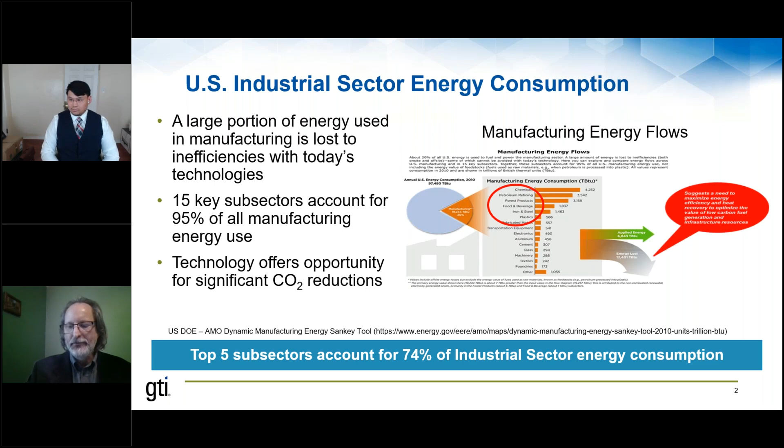We also look at the industrial sector as being one of the top producers of CO2 emissions, and we certainly don't want that designation. But most of the CO2 emissions in this area are from combustion, and natural gas is the primary fuel source. We can see quite a distribution between the CO2 emitting sources, but overall, greater than 35% comes from chemicals and the refining industry, with quite a diverse application as well.

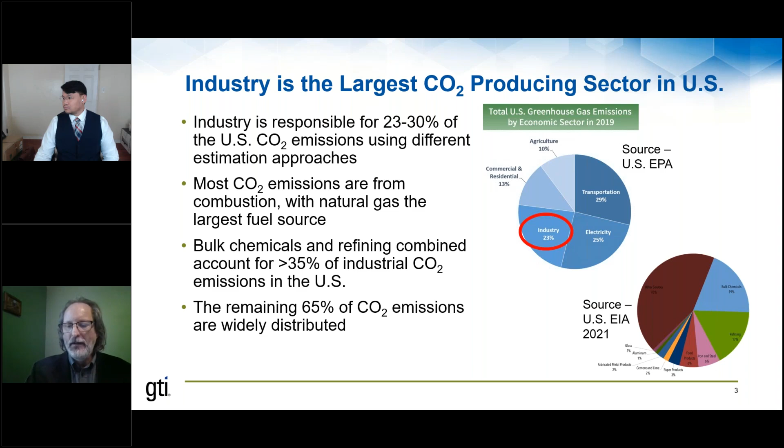When we look at industrial thermal heat, there's 2 paths forward. One is the direct route that could be used in fluid heating application, distillation, or drying, such as textile drying. The other could be indirect, where it's basically used to produce steam for the process.

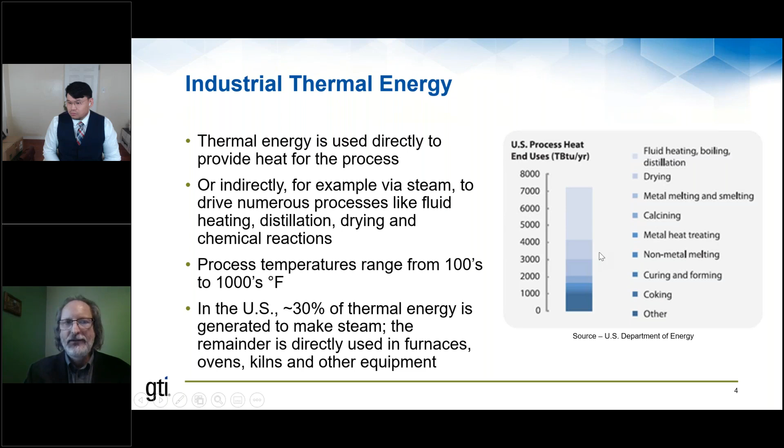And the processes in the industrial space are very, very broad. They range from operation process temperatures from hundreds of degrees all the way up to thousands of degrees. You see a pretty substantial distribution of the energy portfolio for different processes on the right side of the screen.

When we look at the future and start to have discussions about decarbonization in the industrial space, we start to hear about the use of hydrogen, ammonia, other alternative carriers. There's one thing that's for certain about the future, and that's the fact that end users will demand that the thermal energy fulfills their requirement for the process at a competitive cost.

We basically see this demand and characterize it two ways. The first is a temperature, which is set by the process. It could be a roasting application, a batch furnace, or a typical boiler application, and these vary significantly. The second attribute is the load, which is the rate of thermal energy that needs to be transferred to accomplish that process. The underlying fact is that industry needs energy that provides the temperature required, and energy that provides a substantial load for the process.

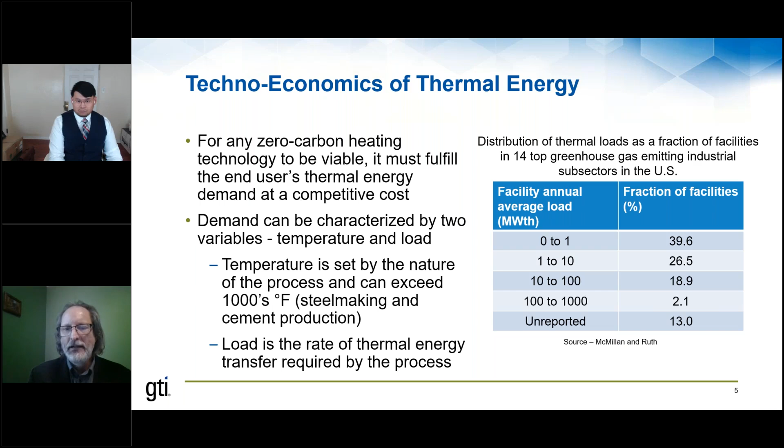When we look at effective thermal energy management, the best way to utilize energy is for every BTU that's consumed, that BTU needs to play an active role in the process. We're simply not at that level right now.

There's been significant discussion about waste heat characterization across different sectors. This most recent study characterized the spectrum as low-grade heat below 300 degrees, about 22% of the market. Mid-grade from 300 to 450 degrees Fahrenheit is about 25% of the market, and greater than 450 degrees Fahrenheit is over half the market. When we look at this, we ask ourselves, there's significant opportunity to recoup BTUs here and apply them to different processes within that application.

Essentially, if we want to really make headway in terms of moving towards a decarbonization approach globally and in the United States, we need to start looking at energy management. It's easy to say that we can switch to electricity or hydrogen or whatever the alternative carrier fuel would be. But remember, the industrial sector consumes almost 20 quads of energy, and a good portion of that, about 13 quads, does not participate in the process itself and is essentially wasted. So it's going to be one thing to try and find alternative sources for 7 quads of energy, and it's going to be much more difficult to find alternative sources for that full 20 quads of energy.

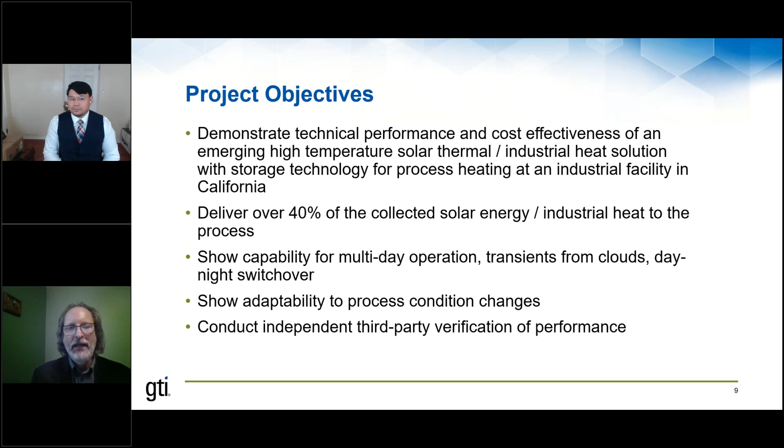As we develop the technology and scale it up, we see the first market entry point as being a 2 megawatt system. What we envision from this is, through the process, capturing at least 40% of the solar energy or 40% of the industrial heat energy and being able to transport that through the system.

Let me show you graphically how the system works. If we were to have a sun shining down on a typical parabolic trough, which is a curved mirror with a pipe in front of it through which the heat transfer fluid travels, that sun would shine onto the mirror and the rays would heat up that pipe.

Now this system on sun could easily be replaced with a batch furnace, a galvanizing line, a reheat furnace, or a roasting operation, where instead of the pipe receiving heat from the sun, this pipe would be located in the flue of the process, and the flue gases would travel across this pipe to heat up the fluid.

The way the process works is there's a hopper full of particles, and there's a blower. The blower starts and conveys particles through the piping, through the heat source. The heat is conveyed from the process into the particles, and then the particles are transferred to a storage hopper for later use, or directly to the process itself through a heat exchanger to dissipate the collected heat to the process. As the particles leave, they cool down and return back to the storage vessel, a closed loop system.

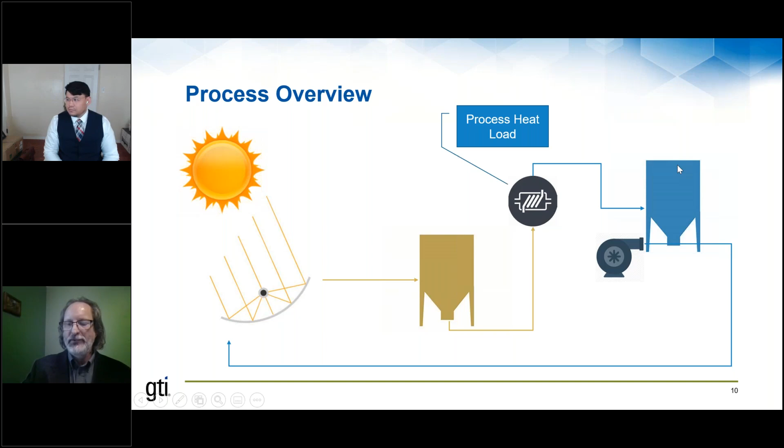When we look at it from the solar perspective, we have this solar concentrator, the parabolic trough, and the gray cylindrical pipe there is the typical absorber. What our process does is add a vacuum tube around the gray pipe, or the absorber, and that's a vacuum. Inside this glass pipe, there's this red image that represents a secondary concentrator.

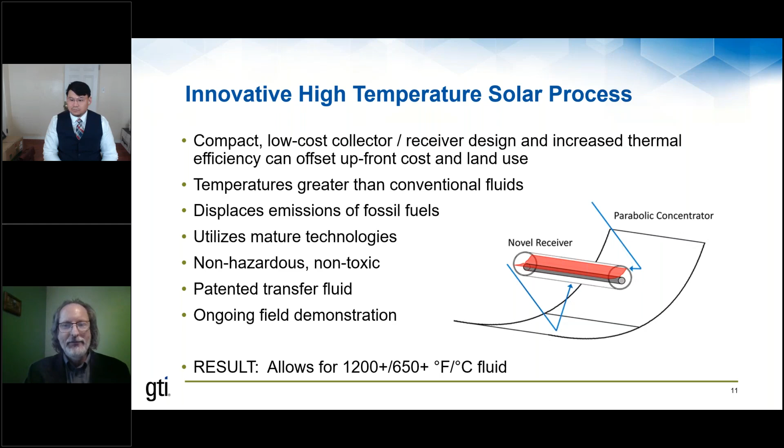In the traditional sense, when the sun comes in and is reflected off the mirror and absorbed onto that absorber, only a very small section of that absorber is illuminated by the sun. But by adding these non-imaging secondary optics shown in red, we are now able to take the solar coming in and bouncing off the mirror, and it bounces off the secondary concentrator to completely illuminate the absorber. We call this the pi effect. This allows us to take what would be a traditional receiver that operates at an output temperature of about 400 degrees C and increase the output temperature up to 650 degrees. Not a lot of changes, just very specific changes.

When you look at the industrial heat aspect of it, you can step back and say, well, what if I don't want to do solar? I have this nice reheat furnace that has a lot of heat going up the stack. Let me replace the parabolic concentrator with an industrial application, my reheat furnace, and I'm able to grab that energy going up the flue and recycle it back to the process or another process within the plant. There's tremendous opportunity there for advancement.

When we look at the industrial sector, over 46% is dedicated to process heating applications. A lot of potential moving forward.

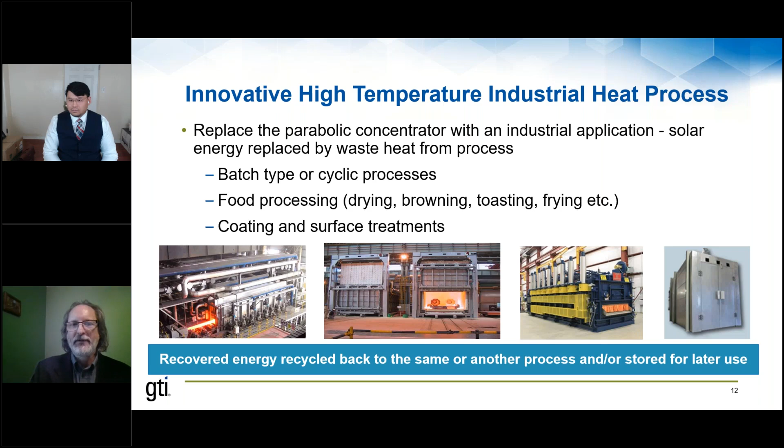Let's talk about the fluid. We have this particle, and we convey it through the system with compressed air. Very generic, nothing elaborate. When we first started the research activity, we looked at about a dozen different particles. Some of them stick, some of them clog, they didn't work. We looked at different size particles and really dug in to find the limitations of different sizes. It's important to have a certain shape of particle, because as it's flowing through the system, you certainly don't want abrasion destroying your piping. So we spent a lot of time characterizing the particle flow as well.

We use something called dilute phase transport, which I'd equate to being in the middle of a snowstorm with the particles being the snow coming down. Ultimately, what we did is focus on something called dense phase transport, which I'd equate to having a tube of toothpaste and squeezing the end of the tube—the particles travel through the piping in a slug fashion, moving through the entire network as that slug moves forward. We learned a lot during the development, and it was really exciting.

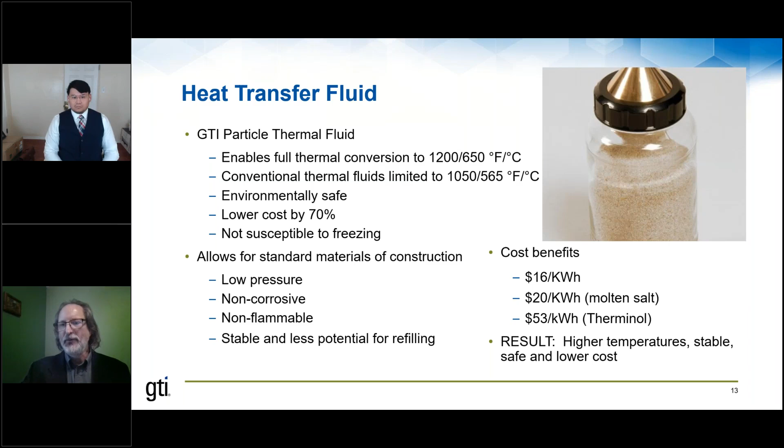So in terms of high temperature heat recovery, there's two paths. The first is to have a solar concentrator and have the benefit of capturing solar heat for the advancement. The second path would be to apply that technology through an industrial heat application with proper particle handling equipment, which is all very mature, and it would transport the particles in a dense phase mode, and it would offer the storage component as well.

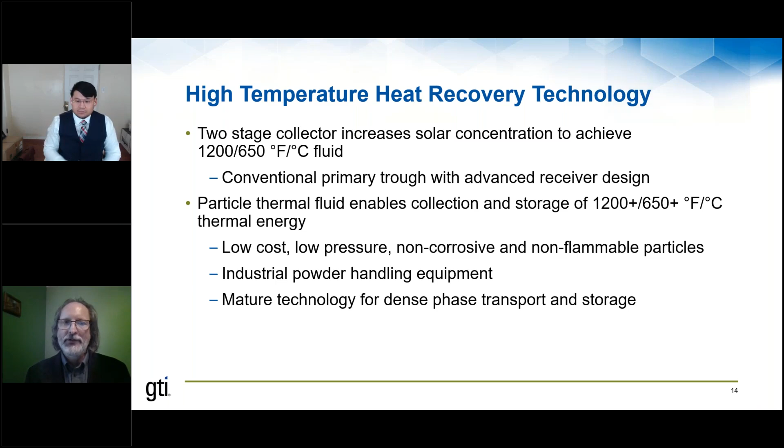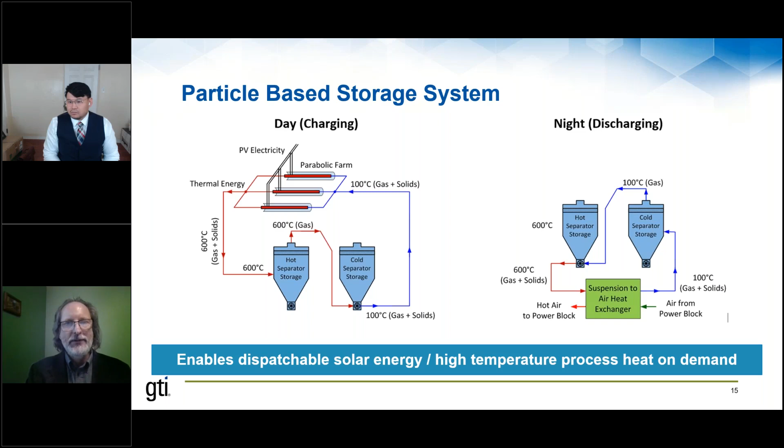This particular graphic shows a little bit more details. In a typical charging operation, the particles leave the cold hopper at a low temperature. They go through the solar component or the batch furnace in the industrial sense, pick up that heat and come back. In the discharge, you send the hot particles through a heat exchanger. What's critical is that you have the ability to store high temperature process heat for off-design time throughout the day. In order for solar to really be a viable technology moving forward, it needs a storage component mechanism, and this offers that mechanism.

This slide shows some of the early work we've done at the University of California, Merced. It shows the particle rig in the background on the left graphic, together with a parabolic mirror and our absorber that was 1 meter long, on sun testing, with a close-up image on the right side. It's really impressive to see the amount of sun coming off the mirror and illuminating that 1 meter long absorber.

This particular system has operated at 685 degrees C. That's the outlet temperature, over 1200 degrees Fahrenheit. And we had multiple discharge cycles throughout the test campaign.

The storage hopper has a defined volume. As you transport those particles through the system, you come to the point where you consume the available volume of particles in that storage vessel, and then you have to recharge the system for the next round. We consider that a particle cycle. We have over 200 cycles on this particular system on sun, producing heat at 685 degrees.

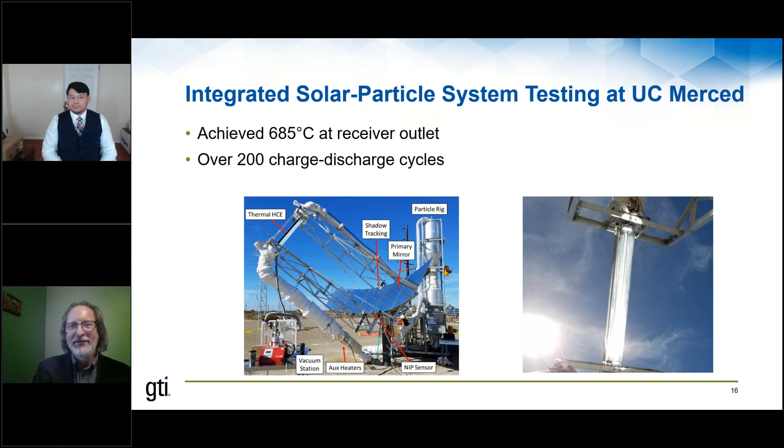We started that work with the smaller 1 meter long absorber, and now we're transitioning to a typical parabolic trough. For those who may not be knowledgeable in that area, there's an image in the lower right-hand corner. A parabolic trough is 17 meters long by 7 meters across, and the solar farm is made up of several of these. When we look at scaling our technology, we would need about 90 of these parabolic troughs for a 2 megawatt system. Right now we have a single parabolic trough unit installed at the University of California, Merced, where we're testing the absorber to characterize the performance of the system.

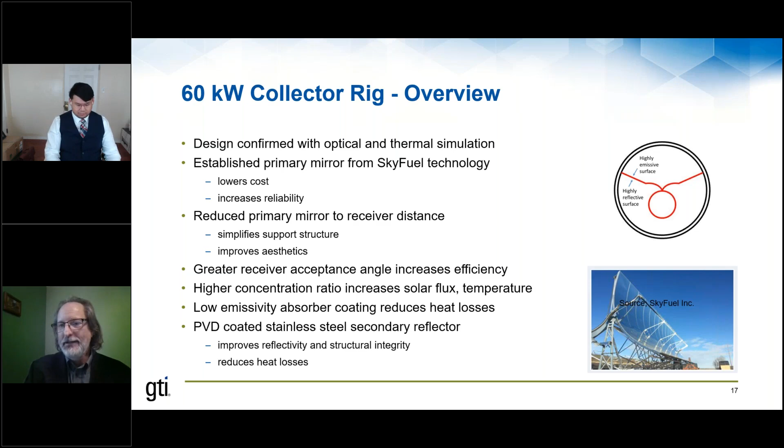The work completed at GTI has been the particle work. We built 2 test rigs that will be transported to University of California, Merced, and then combined with the system, and the entire unit will be tested on sun. Really excited about the potential to bring these 2 units together.

This slide shows the particle work we've tested and developed at GTI. On the left side, you see a storage hopper - for perspective, this is 6 foot by 6 foot, and about 16 feet tall. It's all skid mounted, ready for transport, and can be turned on its side and transported via semi-truck from outside of Chicago, Illinois, to the Merced campus. These smaller pictures show how we've integrated all the controls onto the skid to make it self-contained.

As we transport the particles through the system, we use this load cell on the storage hopper to give us an idea where the particles are. We know what the initial weight is of the storage hopper, and we know how much weight we put in the hopper regarding the particles.

As we monitor that weight in this vessel, we also know the length of the piping that connects these two units and the diameter, so we could characterize where our particles are throughout the system. On the right side, you see the other two units we built: the receiving hopper at the top and the lock hopper at the bottom.

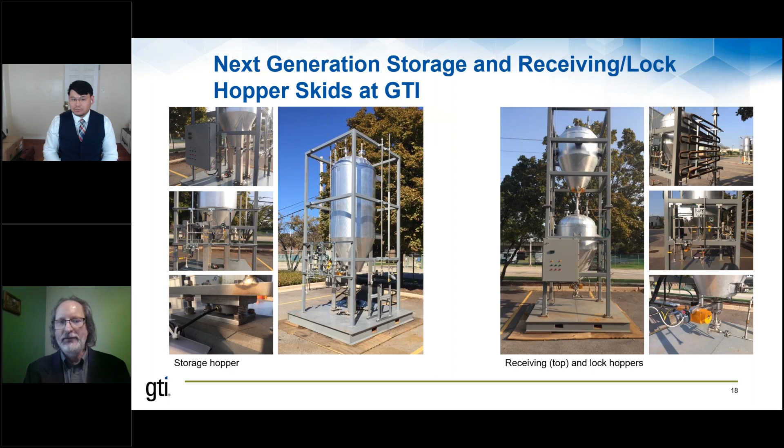So let's talk a little bit about the advantages. This is really what is a necessity for solar to be available mainstream: a dispatchable, renewable storage solution where solar heat can be captured, stored, and then used at a later date. We're very inclined to the sustainability movement, the synergies with the environment, the environmental awareness and safeguards as we're developing the technology.

To ultimately expand the renewable portfolio. I'll show you in the next slide a little bit more on the solar. But the main driver here is the potential to come away with solar heat or industrial process heat by reducing the consumption of fossil fuels and CO2 emissions. So we're contributing to our future in a sustainable sense, being able to manage the fuels that we have and the mix of technology that we have.

And what I've shown you today essentially uses, for the most part, mature technology, with the exception of the non-imaging optics that were part of the solar collector. And it offers a tremendous opportunity to capture some of that waste heat that's available in industry.

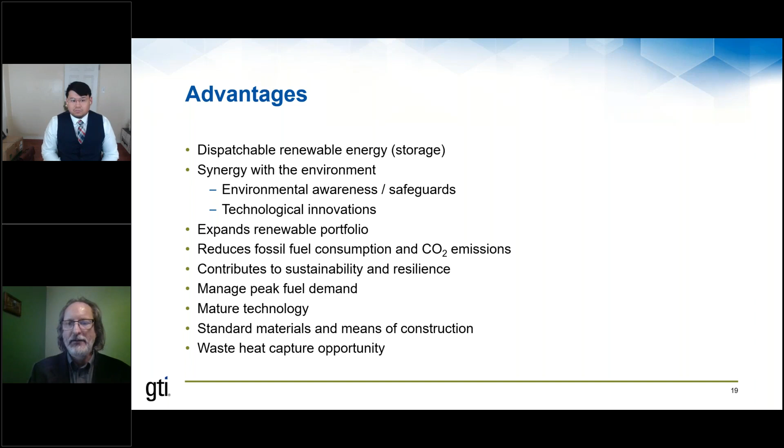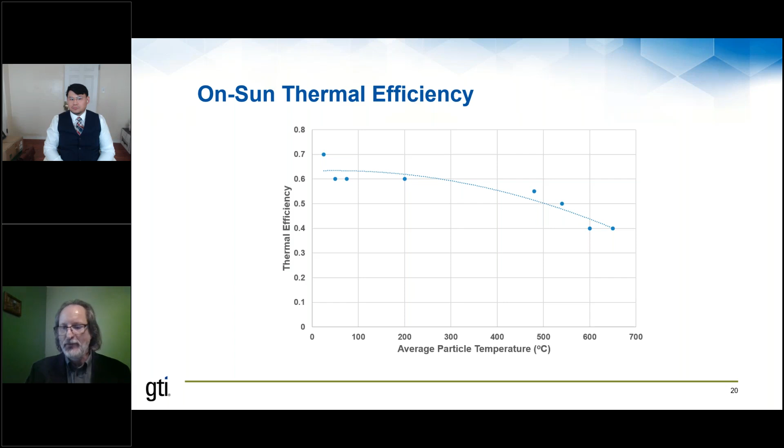And so in terms of applications, we see process heat as the near term. It can certainly be power generation, but that's complicated by the power block, and there's significant additional costs associated with the power block. So I would prefer to defer that for further down once we get some experience of putting these units into the system, out into the application and end user environment.

And the other point I wanted to touch on is that based upon my industrial experience, there's a lot of end users that are really limited in terms of capacity with their existing system. They're peaked out in the summertime because of the cooling loads, the electric infrastructure, with the blackouts rolling across the state periodically. But there's also those consumers that are at the limit of their permit—they cannot burn any more additional fossil fuel because they would go over the permit value. So this type of technology gives those users the opportunity to back off on fossil fuel, to basically increase their production output by installing such a system as this.

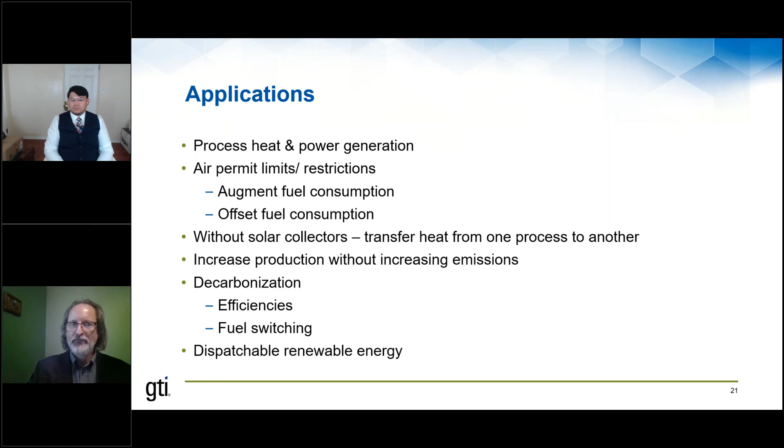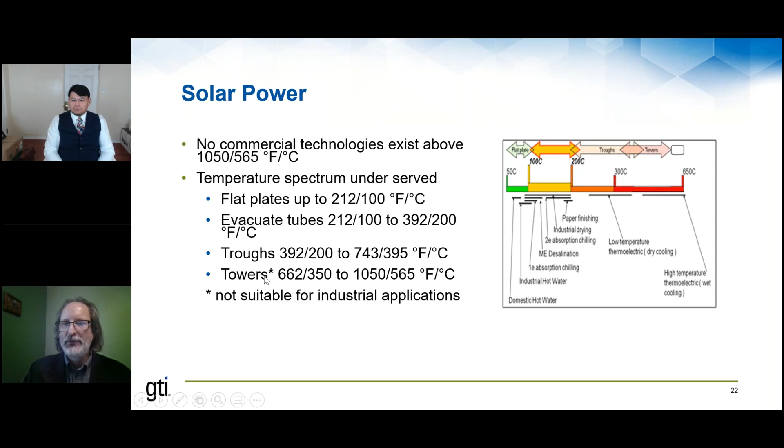And it would allow end users to move towards a decarbonized environment and also allow fuel switching. In terms of the solar power spectrum, this graphic shows where we're at. We're all the way out at the end, past anything that's commercially available in terms of heat generation right now, at the 650 degrees C we've already demonstrated in the system. When we look at the lower temperature spectrum, the parabolic troughs have a long range that would help industry, but unfortunately a tower application would not be suitable for industrial application.

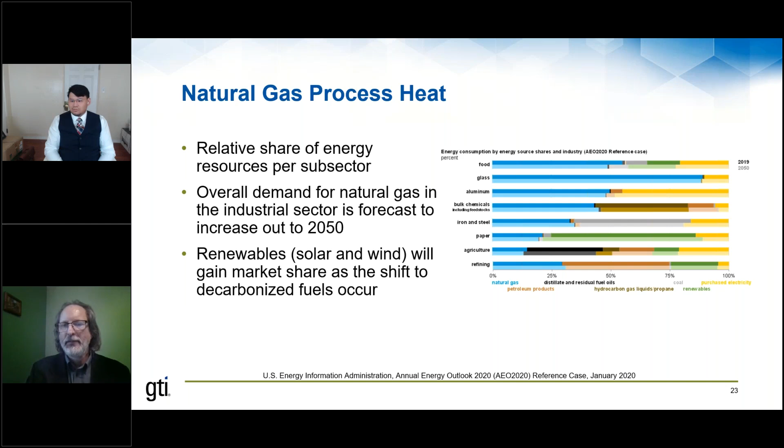The biggest market and the largest potential is in process heat. I started my presentation by talking about waste heat being a significant source, about 14 quads of energy. These top 5 sectors are mainstay in the state of California — the vast majority of food is produced in the San Joaquin Valley — and there's a tremendous opportunity to capture the waste heat I've talked about earlier.

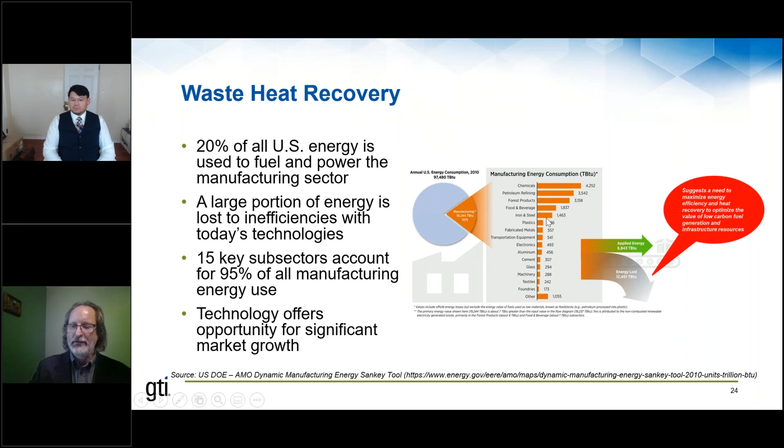So in summary, we hear a lot about decarbonization. It's really starting to gain momentum globally, as well as in the United States. And as a research engineer, I have a lot of questions — I don't necessarily have all the answers — but in terms of decarbonizing, there's certainly a path moving towards hydrogen or ammonia or other alternative carriers.

But I prefer to step back and reflect that there's a significant opportunity in terms of energy load that we need to do some, for lack of a better word, housekeeping on. We need to be better in terms of how we use our BTUs and apply them to the process. A technology such as this offers significant potential for improvement, as well as emission reduction through the reduction of fossil fuel and CO2 emissions. At the same time, it would make natural gas even more competitive.

Tying it together to augment the load and provide solutions for end users is really critical moving forward. It also offers an opportunity for low-loss transfer of heat, as well as storage of heat for use at off-design conditions. You can generate a lot of heat through those particles, storing them in that vessel at higher temperatures that can then be employed through your process.